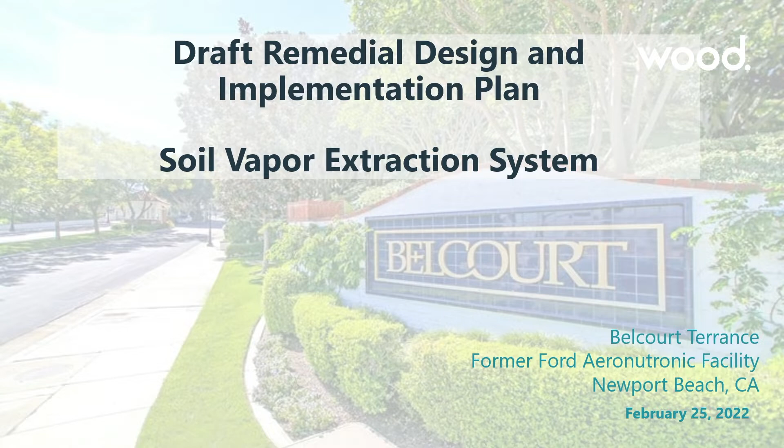This is the community meeting to discuss the remedial design implementation plan, which is the guts of the cleanup plan that's been approved by the water board. This is actually not a water board meeting. Wood is sponsoring this meeting. Wood is hosting this meeting on behalf of Ford, and Wood is the environmental engineering consultant firm that Ford has been using this entire time.

So with me tonight, first of all, is Jessica Law. We all know Jessica, she's the project manager who's been leading this project for several years. Also here is Hui, who is with Wood. She's an engineer and she'll be making the presentation tonight. Mike Barnes, I think everybody knows Mike Barnes, he's been managing this project on behalf of Wood. And then Daniela - Daniela, you are a registered engineer?

Yeah, professional engineer. So our presentation tonight is about 20 minutes. And again, the cleanup plan for this site was approved. This is to discuss how it will be implemented and what that looks like, and to get comments or questions from you on that. Hui will give about a 20-minute presentation on the RDIP, as we call it, and then we'll open it up for questions and answers. If you have a question during this, we have no problem answering it.

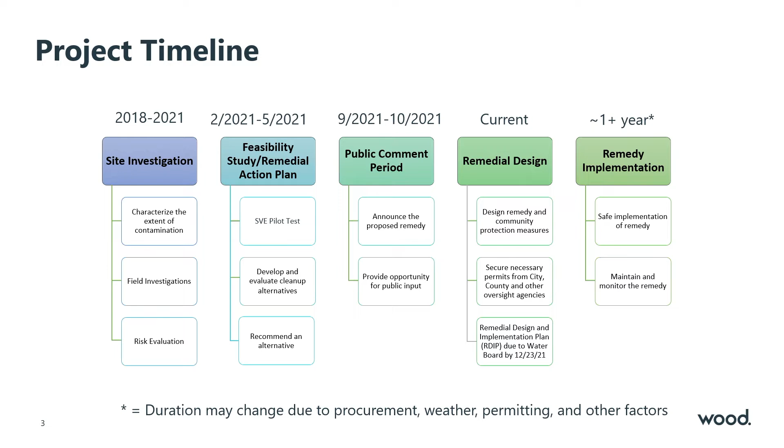I'm the design engineer for this remediation project, and I am going to give you an update on our design and our plan to implement this project today.

As Mike mentioned, previous investigation and risk assessment concluded there's some vapor intrusion occurring in some of the properties within your community. As part of the solution, we've been working on a longer term solution in addition to temporary measures, like distributing air purifiers to some homes.

The longer term solution is part of the FS report we were talking about. We evaluated different technologies, and the goal is to meet the remediation objectives and protect human health and the environment. Among the different technologies we evaluated, the Water Board approved soil vapor extraction as the remedy.

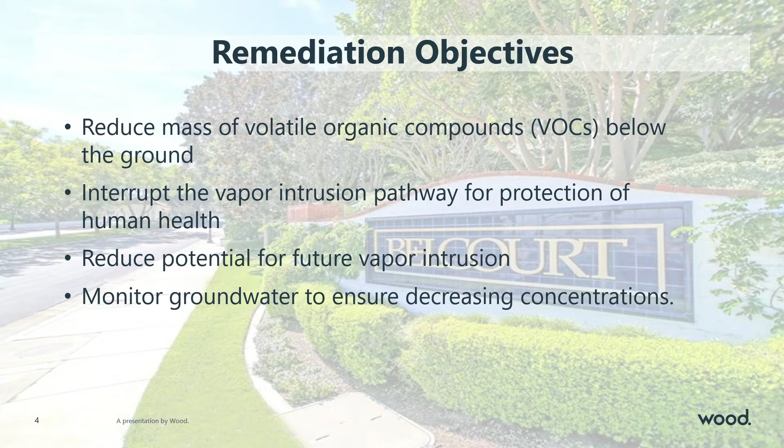After the remedy was approved, we've been working on the actual design of the system, and that's what I'm going to talk to you about today. So first, just a little recap—what is SVE, soil vapor extraction?

Vapor intrusion occurs when vapor in the soil migrates into your house and affects your indoor air quality. You can think of the soil vapor extraction, or SVE, system as a giant vacuum.

We install an above-ground vacuum blower and extract contaminant vapor from underground through the below-ground SVE, or soil vapor extraction, well. The extracted vapor is then treated by an above-ground treatment system and discharged to the atmosphere under a permit from the air board. By removing the contaminant from the soil, we can interrupt the vapor intrusion into the building.

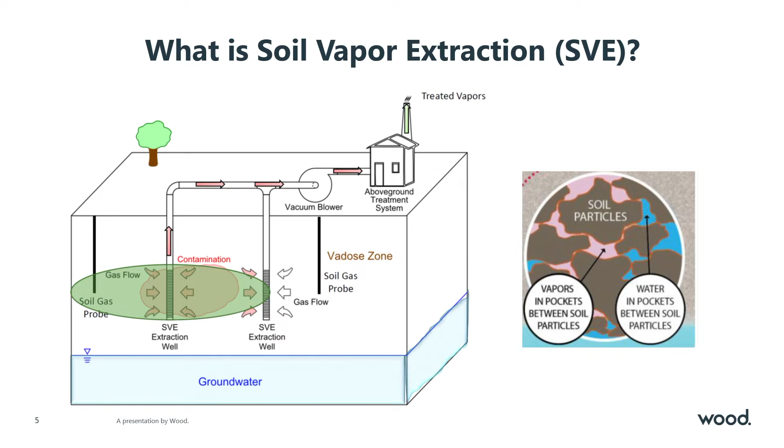We estimate the ROI as 70 feet, and the ROI, or radius of influence, is basically how far a vacuum applied to an SVE well can reach, so like how far it can be effective.

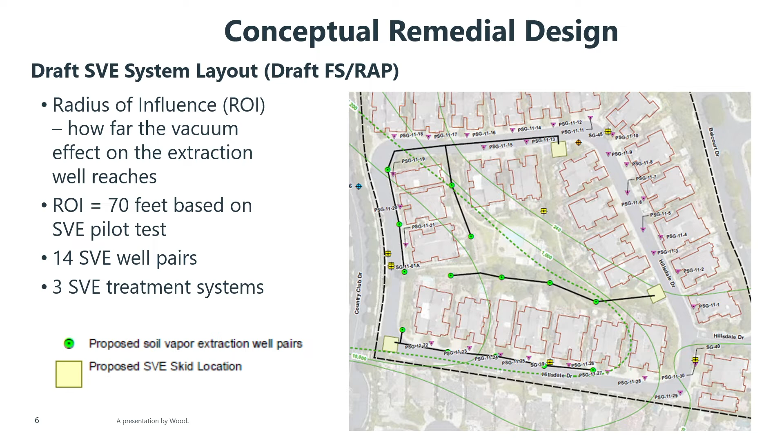But during the design process, we worked with your HOA and tried to minimize the impact to the community while still meeting the remedial objectives. That's what I'm going to show you - what our revised system looks like now.

Here's the design process we went through. First, based on the pilot test results, we estimated and chose the appropriate vacuum and flow rate of the system, then calculated the pressure drop through the system and sized the equipment like the blower and the piping. We also ran a numerical model to evaluate the performance of the system.

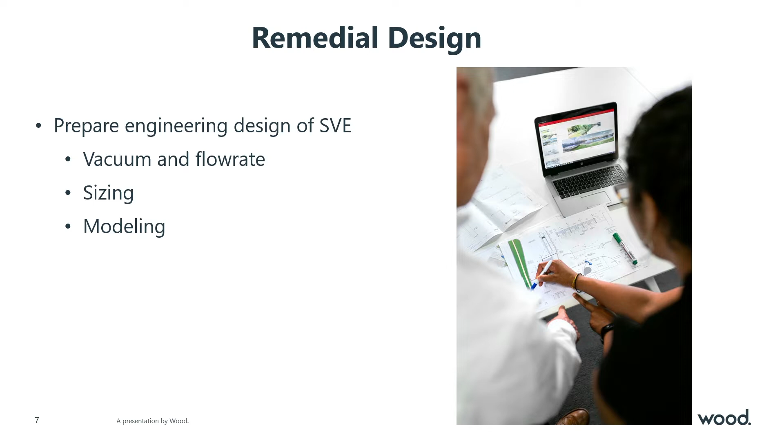So that's how we evaluated the system, and the model results actually showed us the ROI is larger than we previously estimated - instead of 70, it's actually 100 feet.

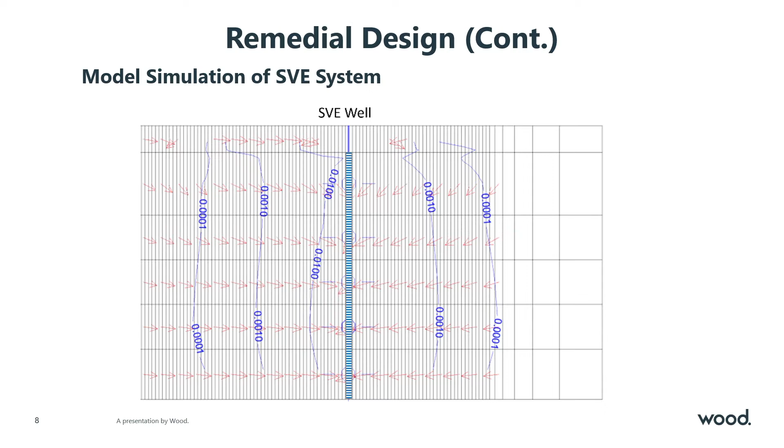This is not going to work. Sorry, I'm just going to stand up. We will also be able to decrease the number of treatment systems from 3 to 1. This pointer's not working.

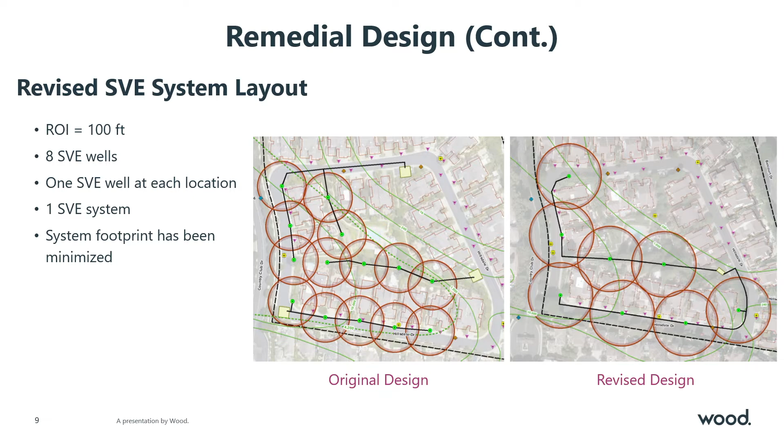As you can see, this is a much simpler SVE network, and also less trenching. Underground trenching means shorter construction period duration too.

Also, because we walked the site with Mark and Carla back last year, we chose the location of the treatment system to basically minimize disruption to your day-to-day life. That's why we're not using a parking lot.

I just want to emphasize our model shows the simpler SVE network will still meet the remedial objectives. As I'll mention later, we will continue performing monitoring of the indoor air and soil gas to evaluate and show the effectiveness of the SVE system.

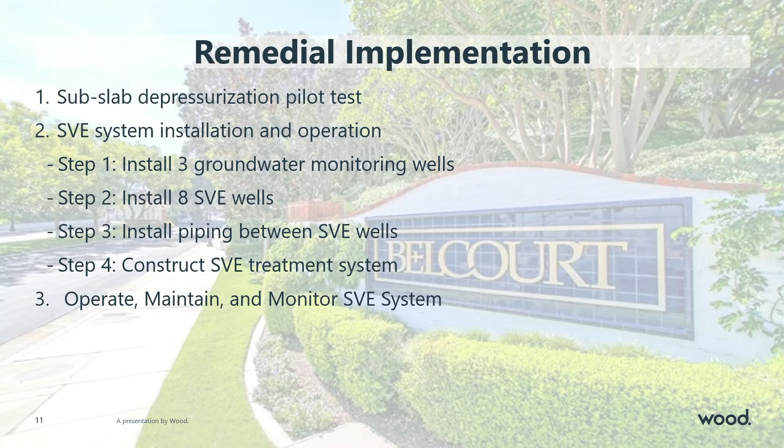So before we actually install the SVE treatment system, we plan to conduct a sub-slab depressurization pilot test first.

The SSD is a contingency remedy, just in case the SVE cannot effectively prevent vapor intrusion. There are a few reasons we want to conduct the SSD pilot test first.

First of all, it has the least impact on the community - we're going to choose one house and we're looking for volunteers, and the whole test is going to be less than one week. Another reason is, although this is a contingency remedy, it's good that after we conduct the pilot test we'll have all the design parameters ready in case we do need to design it in the future.

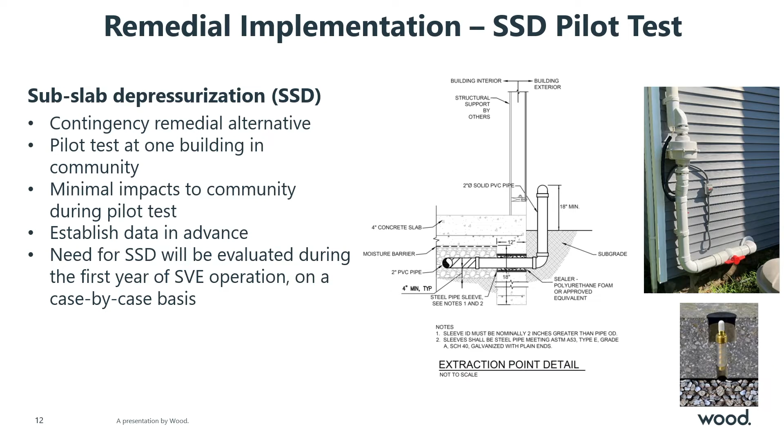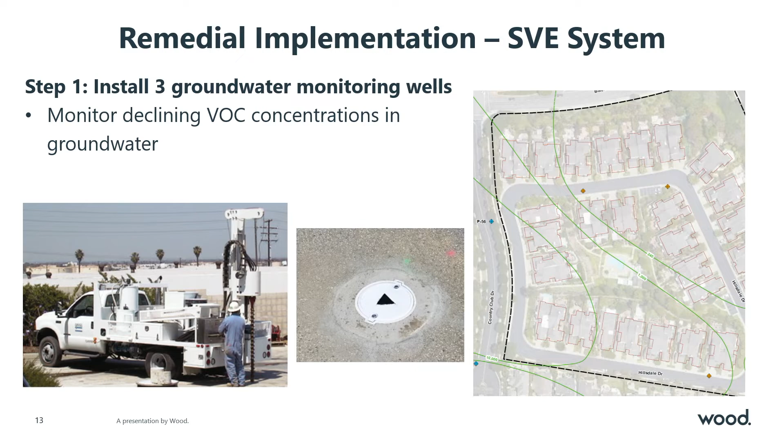And I know you guys have really good landscaping, and are very proud of that. We'll definitely match that to the current condition. So the word Mike used is, if it's not the same, it's going to be better.

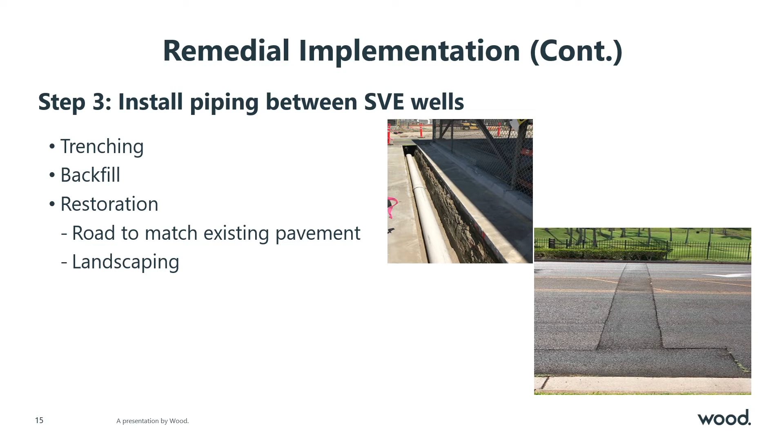We are also going to work on the exterior of the building, to make it match the houses in the community. Our plan is to operate the treatment system continuously for 1 year, and after that we will spend a few months to collect additional data, conditional samples, and then evaluate whether it's effective, evaluate the performance of the system, and then make a decision.

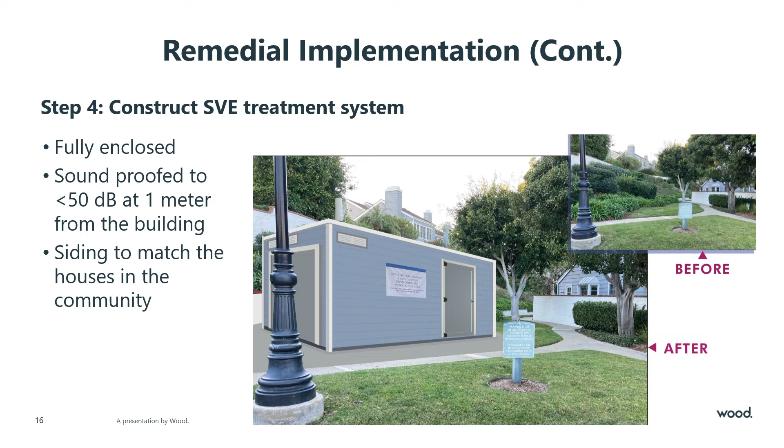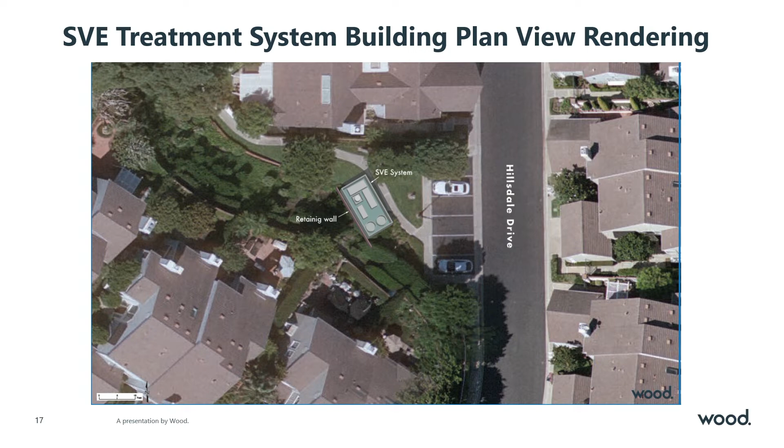So after the system is installed, we are going to the OM&M phase, and so for the first week or so, we're going to start the system, fine tune it, make sure it's operating as designed, and then, as I mentioned earlier, we plan to operate the system continuously for 1 year, and monthly we'll come collecting samples to evaluate the performance and also to be in compliance with the air district permit.

Besides the monthly visits to the site, we will come periodically to perform necessary maintenance. After 1 year's operation, we'll shut the system down and collect some additional samples. Also, in the meantime, we are going to continue the routine sampling of groundwater, soil vapor, and indoor air.

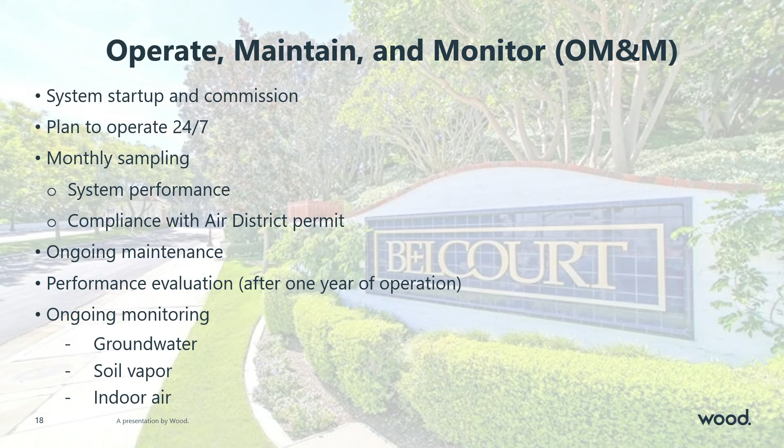We plan to turn the system on toward the end of the year and then run it from end of this year toward end of 2023. After that, we're going to shut the system down, collect additional samples to evaluate the condition and the system performance, and then we'll make a decision on the path forward.

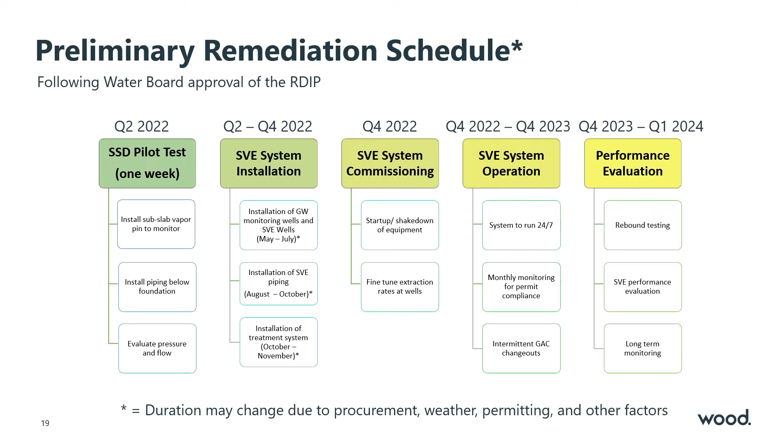One thing I wanted to add with respect to communication to the community: when we get ready to do any of these activities, we'll send out notices of work. It'll basically be a document introducing ourselves again, the goals and objectives of that said work. It'll have a schedule, some pictures of what to expect, along with phone numbers for you to reach out and contact people. So we'll work very closely with the HOA so a drill rig doesn't show up that you didn't know about.

Oh, we have two microphones just in time. Thank you. Okay, I'm going to open it up for questions, and I see him, but are there other people? I'm going to do the popcorn thing because I'm old and tired and cold. So one, two, and who else? And back here. Okay, perfect.

You're going to be evaluating this at the end of one year of operation. What makes you think that the problem is actually going to be remediated in a short amount of time? This has been percolating for the better part of 35 years, and I don't see that one year, no matter how effective this remediation is, will actually remove this vapor in a short amount of time.

Excellent question. So we did conduct a soil vapor extraction pilot test in the neighboring property at Bay Ridge Park, and based on the performance of that system, we're able to evaluate how much mass we can remove from the subsurface. I should clarify that the evaluation process of the system will be continuous from the time that we turn it on throughout that entire year, so we're not just evaluating it after a year. I think we'll have a pretty good understanding of the effectiveness of this system probably six months into the SVE extraction system startup. Based on the pilot test and our understanding of the radius of influence, the chemicals of concern beneath the surface and their concentrations, and the equipment being used, this is an effective system.

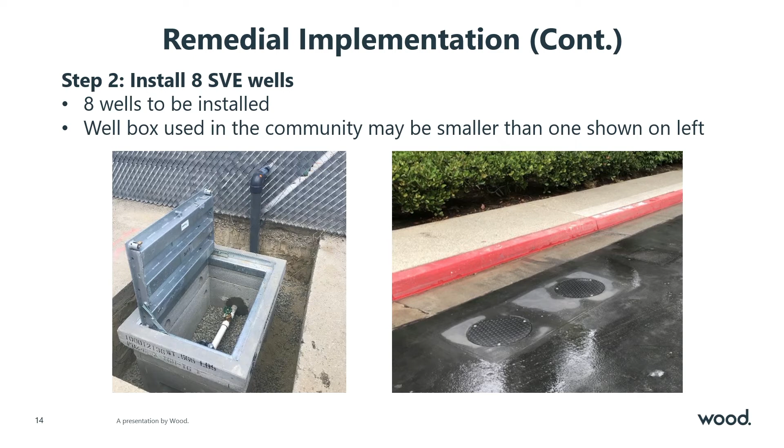Okay, my question was on page 14 where you have the 8 SVE wells, and it appears on the right-hand side of the picture are the round ones that are in the street. Are those the 8 wells you're talking about? Those are actually the pilot test wells we installed at Bay Ridge Park.

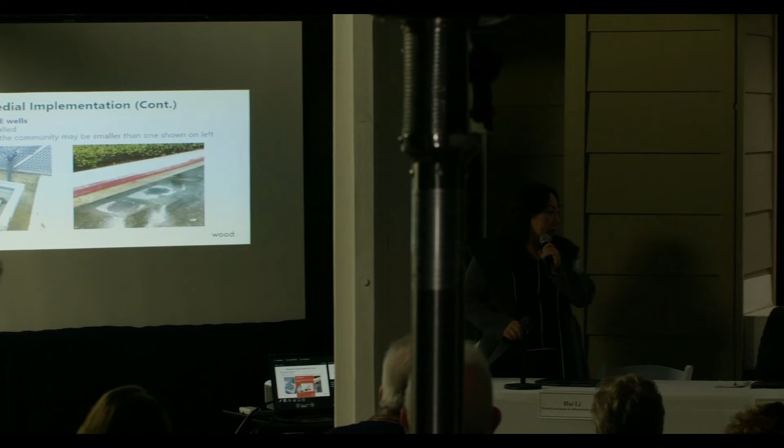Okay, so what is the one on the right? It's a different kind of well box. We are in the process of design, and depending on that, we'll try to minimize the size of the well box.

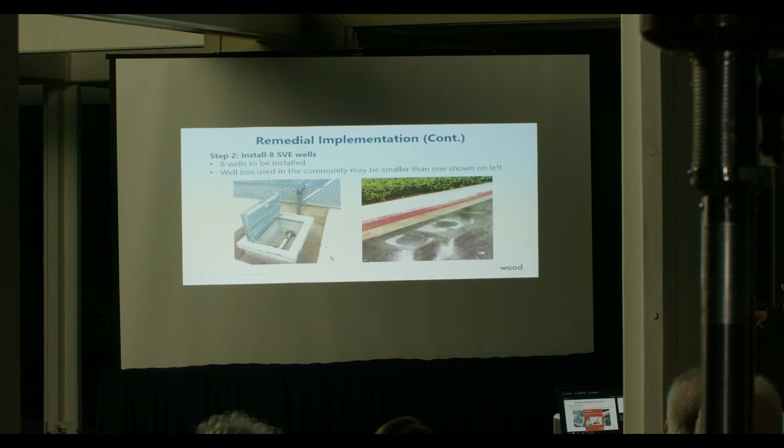So I don't really have an answer yet. You're not telling us which one you're going to use, the round circle or the well box? The well box itself doesn't have all those measuring devices, it doesn't contain those. We already have the things that measure.

The chemical gas, we already have the probes for that. Yeah, this is different. This is an extraction well. Okay, so you're measuring your flow and your vacuum. Correct.

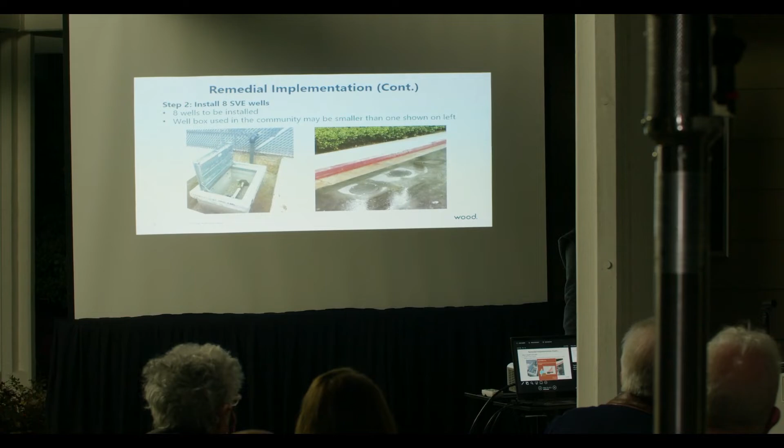So that well would hook up to that building, correct? Yes. So why would we have to have the bigger one compared to the smaller ones? The smaller one is used during the pilot test, and the hose and the measuring device is outside. We basically keep that open. I wonder whether we still have a poster.

I think I can answer your question. So the one on the left, if it was like an industrial area, that would be our preference because we can include all of our equipment into that well box. Granted, it's a big well box, and so we're trying to figure out a way that we can minimize that footprint. The ones on the right are an example of a smaller footprint, but they don't get all the information that we need. We can't put all the measurements in that smaller space.

And so we're working to try to figure out, can we get away with those smaller ones and do an alternative way of measurement? Or are we going to need to rely on a slightly bigger well box? Our goal is to minimize the footprint in the street for you guys. And that's still in process. Yeah, the design is still ongoing.

Okay, great. But I take the comment that you would prefer the smaller footprint, which is sort of what we assumed. Yeah, the less obtrusive of anything. Understood. Is the most. Yes. Yeah.

Okay, and back here. And then anybody else? It's working this time. Two questions. One, the one gentleman asked about the efficacy of the remediation. You've done some testing, and so far it looks positive. But unless I didn't hear, how long could this potentially go on?

They'll be traffic-rated boxes and everything - you can drive over them, everything. I do want to mention that the trenching picture there, where it looks like it's been cut, won't look like that. We'll re-asphalt it, recover it and everything, so it'll look nice.

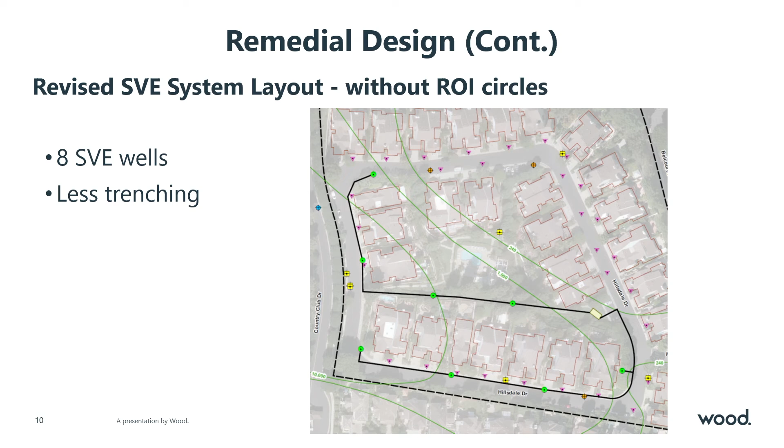Does the well box give off any noise? No.

Perry's got a question here. I would point out that the streets belong to Belcourt Master, so please make sure to coordinate with them when you're resurfacing the streets. Reach out to them and include the association - that's Liz Reed. Please contact her with regard to any removal and replacements.

Now, is Liz the HOA president of Belcourt Master? No, she's with Keystone, the property manager. But she's the one you should be coordinating with, and then she'll surface that up to the board.

Got it. How many meetings have we been to, Mike? Many, many meetings - this is at least 10. And each time I ask, is there legal representation here from Wood who can brief us on the implications to us as homeowners? And secondly, real estate - if I'm not selling my house, but some of us will be selling our homes, what do we tell our real estate agent?